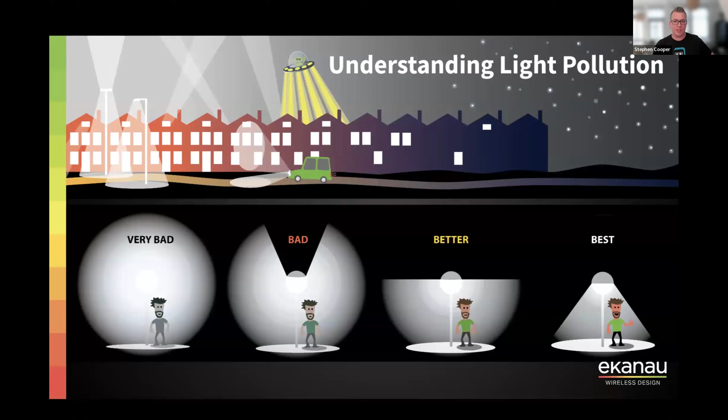So sorry. It's really good, especially if you're working with site foremen and people in manufacturing facilities that are keen to understand. A lot of people are generally curious. They're really keen to understand why do we need to do things a certain way. As Rob mentioned, this is a fantastic way to help convey that message. People might not understand RF, but they definitely can understand the difference between a light bulb and a flashlight.

Exactly. So just a little bit of RF theory when we're talking about antennas, and some of you might be familiar with this, especially if you've done Ekahau ECSE or CWNA, or any other vendor certifications typically cover this sort of fundamental concepts. But really, when we're talking about antenna radiation patterns and antenna gains, whether it's internal or external antennas, everything is in reference to what we call an isotropic radiator, and that is essentially an ideal radiator analogous to the sun. So 360 degrees in both horizontal and vertical planes. Think of it as a perfect sphere. But this antenna does not exist.

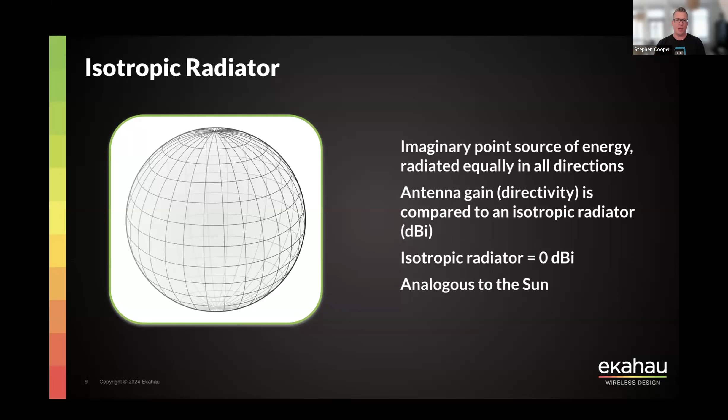It's just physically impossible to manufacture or produce it. But this is what we're referencing when we actually look at antenna radiation patterns. And when we're talking about beam width, and when we're talking about antenna gain and things like that, it's in relation to this isotropic radiator antenna.

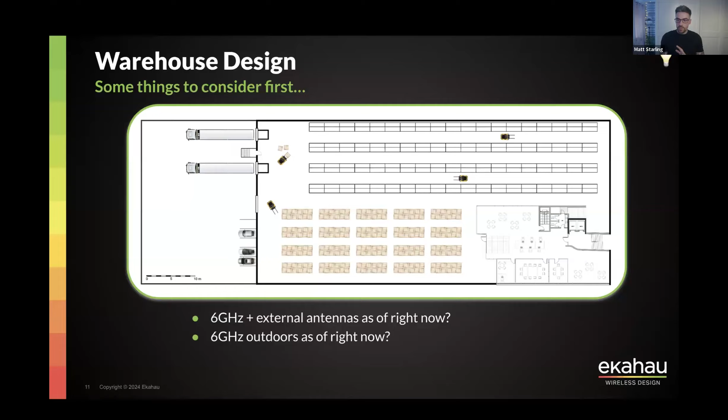But before we pass this over to Rob and Stephen to discuss this and how Juniper Mist approach this and what we can and can't do as of right now, we just want to make sure that everybody on the webinar is on the same page when it comes to 6 gigahertz, because you may or may not be familiar with the 6 gigahertz frequency band and the additional channels and the frequency band that we've got access to recently.

So if you're based in the US, it's fantastic because you get an additional 1.2 gigahertz of spectrum that you can use and leverage. So that would actually equate to something like 59 more non-overlapping 20 megahertz wide channels, which is fantastic because it gives us a lot more space to use for the radios of our access points and the client devices to be able to connect.

However, if you're based over in the EU, like quite a lot of us on the call presenting today, we don't get quite the same amount of access to the 6 gigahertz spectrum. We get about 500 megahertz, which translates into 24 non-overlapping 20 megahertz wide channels. Still fantastic. It means we've got that extra frequency band, that other lane on the motorway we can drive down, start shifting our client devices to 6 gigahertz, which in turn will benefit our older devices on 2.4 and 5 gigahertz.

But with 6 gigahertz, there's a few things we have to think about, especially with getting devices onto the 6 gigahertz frequency band, scanning the channels. But there's also something else called device classification, which I'll hand over to Mac to explain at a high level, because that's going to become very important when we talk about the complex environments.

Exactly. So it's no longer the situation where we have just a 5 gigahertz capable device and 5 gigahertz capable access point talking the same generation of Wi-Fi. Now in 6 gigahertz, we have more device classes and access point classes, and they have different limitations. Just to shout a few limitations: LPI, low power indoor. These are the access points and clients that only can operate inside. They cannot be operated using the battery. You cannot use external antennas. They must be built in, and you have power limitations.

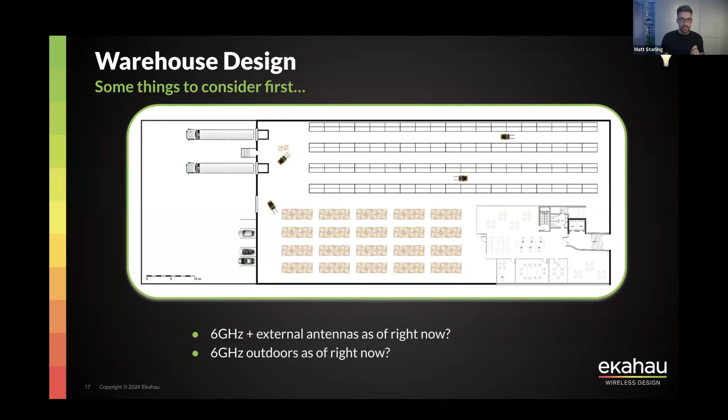So we have a demo prepared to walk and talk through with everybody on the webinar. But before we do that, we have a couple of poll questions we're going to quickly launch and discuss. Mac, maybe you can read it out whilst I get it going. We ask this question quite frequently, so we want to see what's changed.

This will be interesting to see because, like Max said, we've asked this question a few times before over the last couple of years to gauge where the community is at with upgrading to 6 gigahertz and what the current state and plan are. We'll give it a few more seconds for attendees to cast their vote, then end the poll and share the results with you and discuss for a few moments.

In Juniper Mist we've seen about a 20 to 30% adoption rate of 6 gigahertz in some large environments already deploying it, a mix of environments whether higher education, universities, or corporate offices. One big topic we probably won't touch on too much is security and WPA3 being mandatory for 6 gigahertz usage, which plays a big part in adoption beyond RF design and client support, so definitely keep that in mind for network requirements and design.

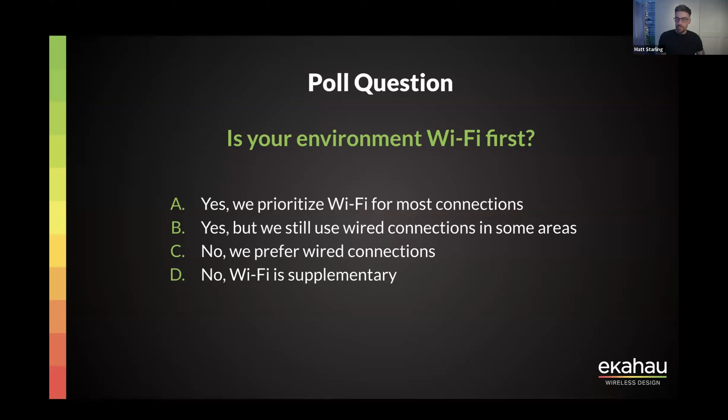Fortunately, a big percentage of the webinar audience does agree how important Wi-Fi is and wireless-first environments. Yes, some might still have some cables, but a big percentage do agree about prioritizing Wi-Fi for most devices. I'm sure 70+ percent think they are close to wireless first. But let me tell you that with the addition of 6 gigahertz, doing wireless first has become practical and not too expensive.

Previously, with just 2.4 and 5 in very heavy environments - tons of density, tons of clients doing tons of things, wireless voice clients on phones, constant video conferences everywhere - it was very challenging. We had to use directional antennas shooting from the top, tons of radios, reuse the frequency in a very smart way. Now it's as simple as doing a high density omnidirectional design in most open space offices with tri-band radios and tons of clients capable of 6 gigahertz. The capacity is there, it's just there. So yeah, especially in the States.

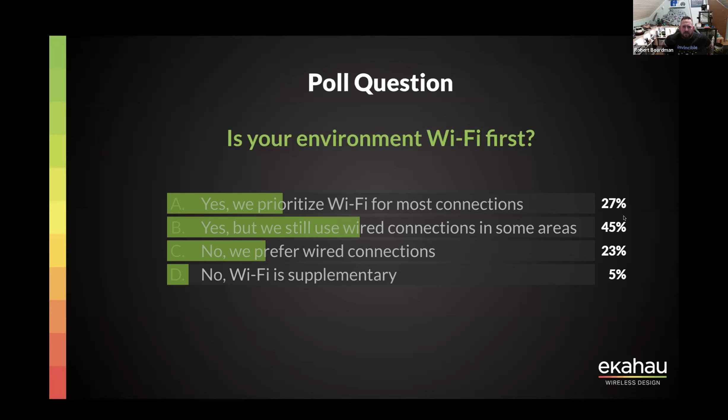I find it interesting that it is much easier from a Wi-Fi perspective now, but I think it's a lot harder from a planning perspective because now you need clients and security looked at again. When we usually go from Wi-Fi 5 to 6, or 4 to 5, the RF changed a little, the protocol changed a little, you might have needed a new device. But adding this spectrum and security completely changes people's viewpoint on how they can do it, because now they have to go to WPA3. And OWE - I think it was one of the best things to come out of the standard because of what it does, and it's probably one of the least used features outside of MU-MIMO.

MU-MIMO. Oh Matt, let's jump into the demo that we've got. I'll stop sharing so you can take over.

Okay, let me share my screen, and there we go. You should see my screen now.

So this is the Wi-Fi design made by the boys, by Rob and Steven. I'm running it because I have the best connection, I'm not on a cable, I'm on Wi-Fi, leading by example. So guys, let's talk through it.

What I have here is the 5 gigahertz design. And as we've discussed before, I've updated the design to 6 gigahertz as well, using the antennas and access points we've discussed. So we have both options.

Guys, I'll be your PA. Could you do me a favor, Matt, and select one of those APs in the aisleway, just at once, so we can see the RF for that. So when we were talking about designing for the aisleway, this is what that antenna does.

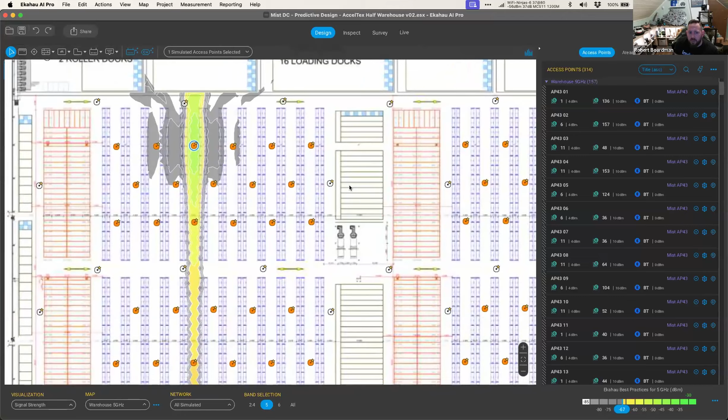As you can see, we are looking to just put it where it goes, so that way the racking really takes the racking out of the equation. This right here is definitely designed for high density.

This is basically 2 AP coverage. I've seen this go from, you could probably dump this down to, I think there's 4 APs per aisle, or 2 or 3 AP. You could probably dump this down to 2, almost even 1 AP if you wanted to be real cheap about it. I wouldn't recommend it, but money versus value is a whole different conversation.

Oh, don't ever put it there. No. In this particular environment, you're supposed to be my clicker, not your own clicker.

This environment was yes, and what this does is it takes advantage of the aisles. That's really what this design does. And in a perfect scenario, this is how I would design it.

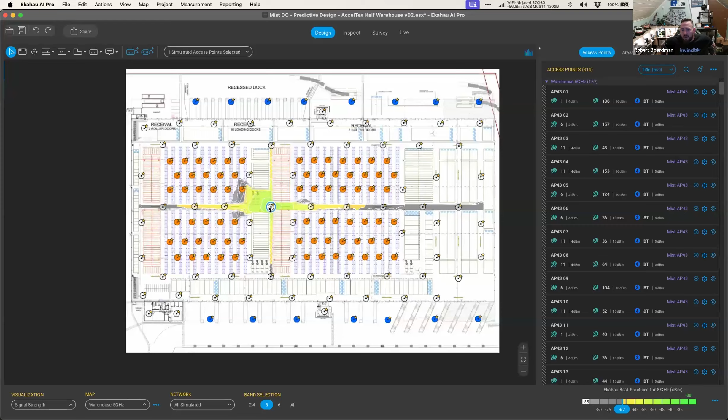If you zoom out a little bit so we can see some of the omnis - the white ones are omnis, and these are actually put in to cover those transitional spaces, and they work really well. Somebody was asking about the mixing of antennas and omnis, and whether it causes any issues - you get a very nice transition.

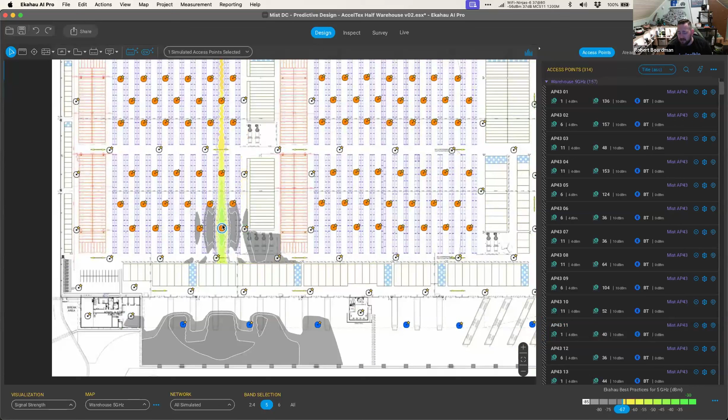You're essentially using the metal and the racking in there to help move things around. So I'd say usually about 1 AP every 100 feet for the omnis, because you don't really need a whole lot. They're low power.

The omnis over here, if you scroll down right there, those are meant for getting to the back of the trucks. As you can see, they're there so they can get back there.

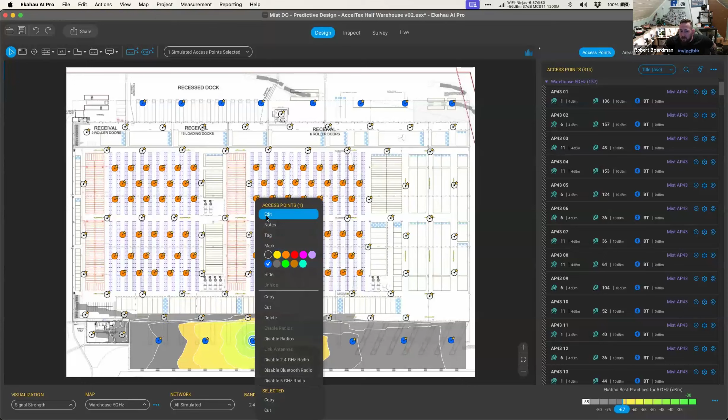And then you also have outdoor APs that help. The nice thing about outdoor APs like this is it's usually when you need Wi-Fi outdoors, it's those trucks. So you'll have the trucks coming in to basically start their communication. It's very low bandwidth, very low need. Latency isn't really an issue, so you're able to push the boundary.

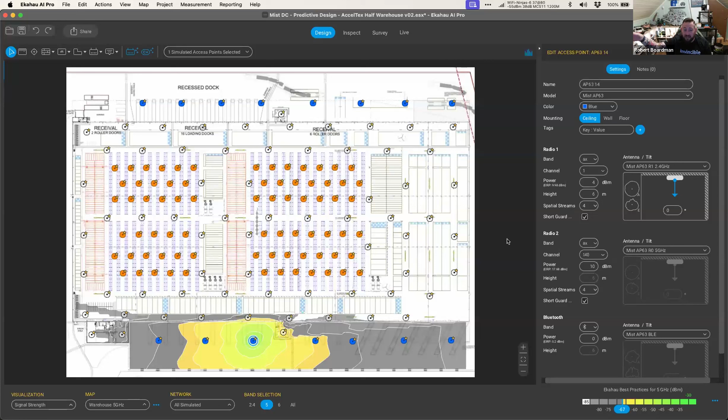You don't need super high MCS rates, so you can actually get like a negative 70, negative 75 out there, and it's fine because it's not for actual use - it's just for trucks to say, hey, I'm here. So you get a lot of coverage.

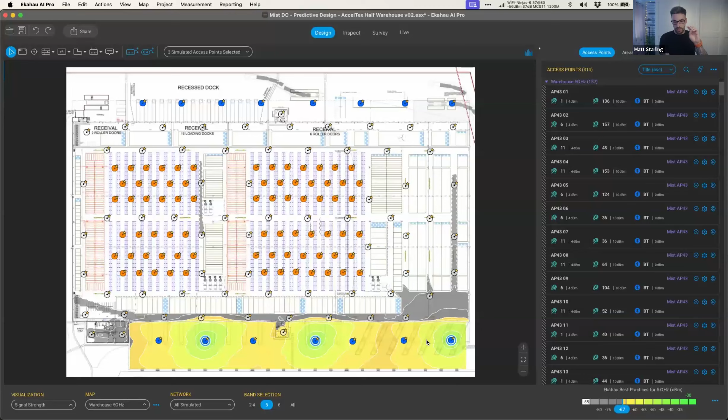Sorry to interrupt you there, Rob. Before Mac jumps to the next design phase he's got prepared, one of the big questions we had is what can we do right now with designing for 6 gigahertz with these outdoor spaces, and with these access points and antennas in the middle of the racks, leveraging the AccelTex antennas. Maybe you can talk us through this section of the design.

So today in the US, you can deploy the 45Es with antennas. 6 gigahertz will be disabled because it hasn't been allowed in the US yet. Most of the rest of the world, you can actually enable 6 gigahertz. There will probably be some countries where that's not the case, but I know here, most places in Europe, you're able to use indoor external antennas with 6 gigahertz.

Same with the outdoor right now. I don't think anybody is allowing outdoor 6 gigahertz yet. But you would deploy your 6 gigahertz capable outdoor AP and you just would have 6 gigahertz not enabled. So you design for it, but you just don't enable that band yet.

Yes, Mac, if you flip to 6 gigahertz, because I think you're on the band selection. So basically you can still design for 6 gigahertz for the indoor spaces and for the outdoor spaces as of right now, but it just might be the case temporarily. You have to have these radios disabled until we're at a point where we can enable them. Is that right? Yes.

So that's what you've highlighted there, Mac, those outdoor access points. So you can plan and design for these APs as of today and have the 6 gigahertz coverage. However, for the time being, they will probably have to be shipped with their radios disabled until a point where we can leverage AFC or standard power or whatever, and then be able to enable them. But you can still plan and design for it as of right now. Yeah.

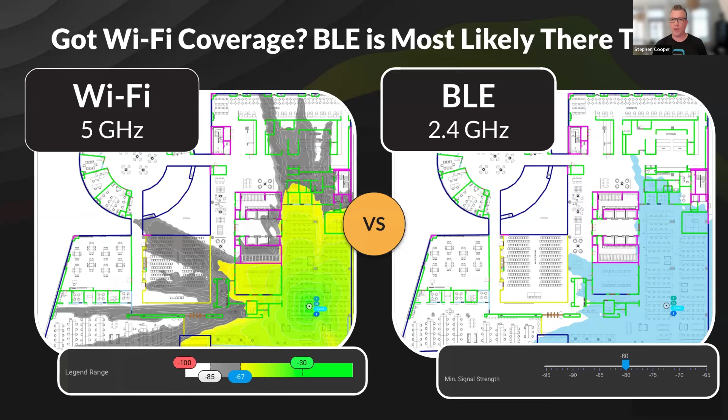And I know, Matt and Mac, you've got some examples of surveying with a Sidekick. So the downlink is fine. You've actually been able to get away with direct replacements from the downlink coverage perspective. So definitely keep that in mind when designing for 6 gigahertz migrations.

Cool. All right, let's talk about location. Bluetooth, big segue there. So now we're going all the way back to 2.4 gigahertz. Fun.

So the reason why we wanted to bring this up is because location is actually very complicated to design for as well if you don't have the right use case in mind. But the same practices that Rob mentioned early on with those opening slides apply. You need to gather the requirements, the use case, the devices, what is the expected accuracy and experience with this. And is the use case in a downstream direction, such as wayfinding on a device, or is it upstream with tracking assets? All those sorts of things need to come into your design for gathering requirements.

What we're looking at here is something unique that we've done at Juniper Mist in terms of Bluetooth location. We actually built directional antennas into some of the best-in-class access points we have, like the AP43 and the AP45, which is this directional 16-element Bluetooth antenna array, which sends out Bluetooth signals in 8 different directions essentially, and also receives in 8 different directions too. And it's at a 45-degree angle down from the access point.

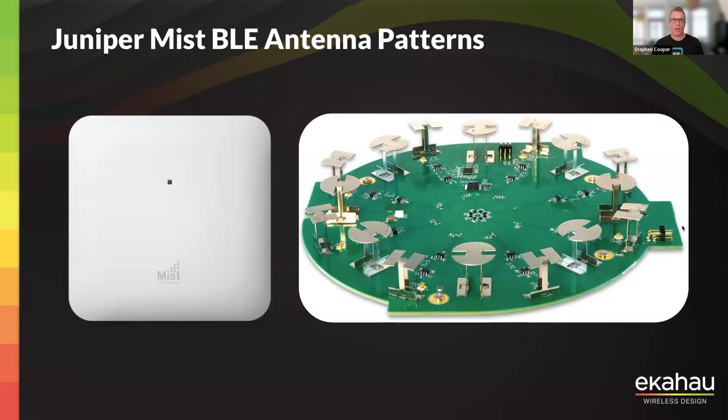So what does this mean? It essentially means that when you're doing a Bluetooth-based location design, because we built this into the Wi-Fi access point, you typically don't need a large uplift in infrastructure, or sometimes no uplift or additional APs when it comes to a high accuracy indoor location use case, because typically we can get about 1 to 3 meters for use cases such as wayfinding. So thinking about finding your way through a campus or a hospital or a building using a smartphone app, or even with asset tracking, 3 to 5 meters accuracy from this sort of deployment.

But there is the option to add supplementary Bluetooth access points in there called BT11s, which I think Matt will walk through a bit later. But there's all sorts of IoT use cases coming out these days, not just Bluetooth. So it's not just about location. You might be designing for some other automation or IoT use cases as well.

So it's very cost efficient. Wayfinding, you know, most people have a smartphone these days. Most people are used to an Apple or Google Maps outdoor wayfinding experience. So it's a very similar use case to that, but indoors. And then you can also use it for location analytics, dwell time analytics, path flow analytics through facilities such as shopping malls and all those sorts of good things too.

So lots of different use cases, but location discussions usually need to start with that question around what's the use case. Yes, and we've actually got a demo ready to show you after this as well, but we've got a couple of poll questions we wanted to ask you.

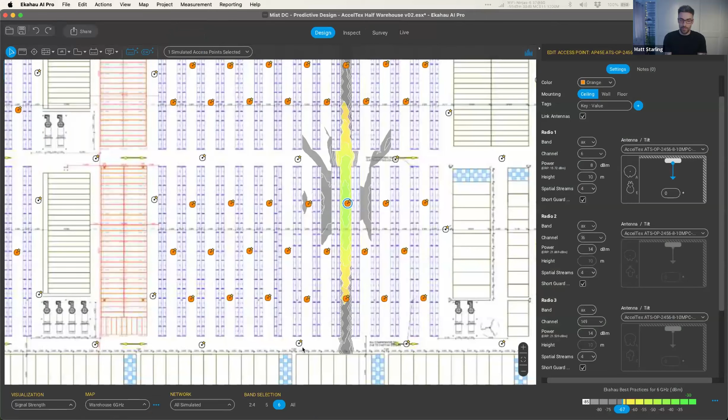Yeah, so close to 60% update the infrastructure between 4 and 7 years. That's the vast majority. Not bad. Cool. All right, Mac. Well, let's jump into the final demo for the webinar today. I know people are very excited to see this one.

Okay, let's do it. So I have a different project prepared for you, so we don't have to draw walls and waste time. I've seen this floor plan before. This must be a very famous building somewhere. It is. It's like half fake as well. So we photoshopped a lot of it.

Okay, so now, boys, we have a floor plan. It is scaled. I can prove it to you. We have a scale here. It is scaled properly, and we have areas where we say this is an office area, and then inside the office area we have an auditorium area that has a higher density of devices. So these are the important talking points. So Rob, Steve, what do I do?

Well, generally I like to start in the highest density areas, the hardest areas. The nice thing about this floor plan is you actually chose something that isn't just typical. Well, let me rephrase it. Some people would just typically blanket this with omnis and call it a day.

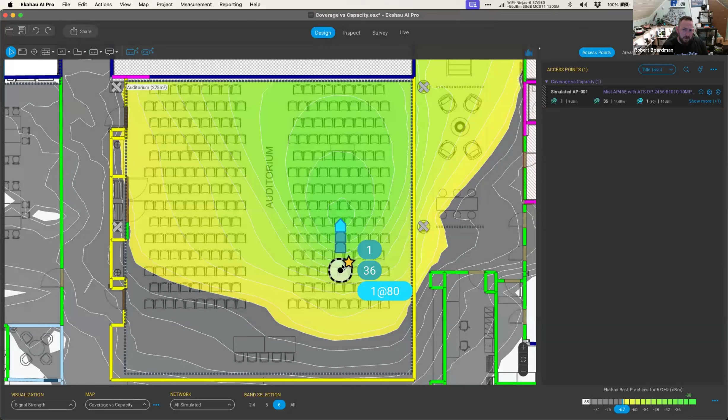But if you start to look at it, it's almost like what I'm going to tell you to put there. You have different types of environments. So this goes back to kind of that similar with the warehouse, where you have different areas and where you need to do that. Let's bring the power down on that 6 gigahertz for me, please.

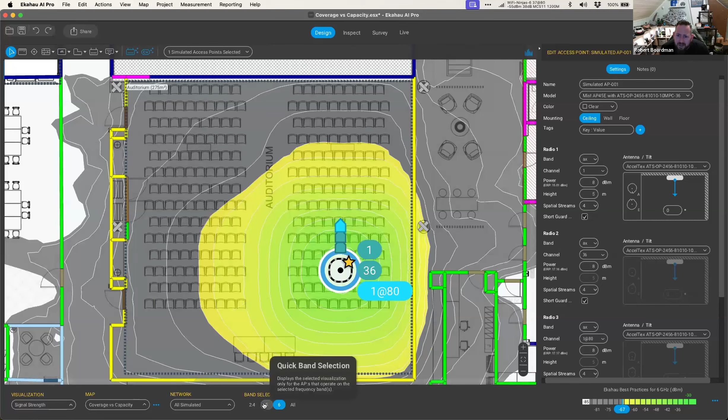Yeah. Is that the right antenna? That's the 8 to 10 dBi gain antenna. Go down. You want a different one? Yeah. Okay. Which one would you prefer, sir? Give me the 710, please. 710. I think that was the right one. Ceiling mounted, five meters above the ground, and lowering the power level.

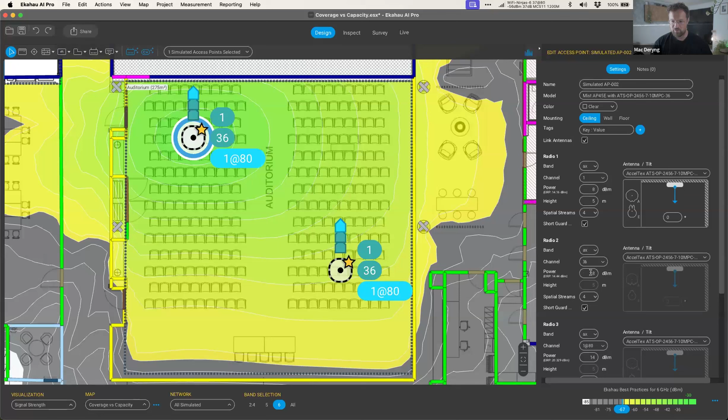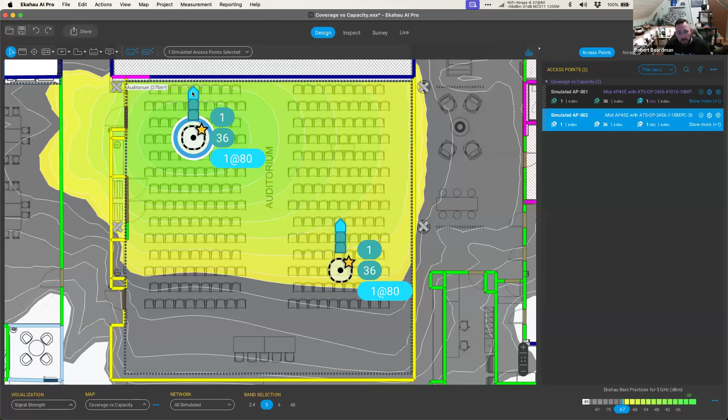But guys, look at the EIRP. So power level is 8 dBm, but EIRP is like 14, 15 dBm. That means that we have passive gain quite high on that antenna. Yeah. So as you can see, if you just select one of those antennas and change that direction, so it goes more vertical, there you go. And now you can see how you're getting that coverage. So this is that auditorium where you have that primary coverage.

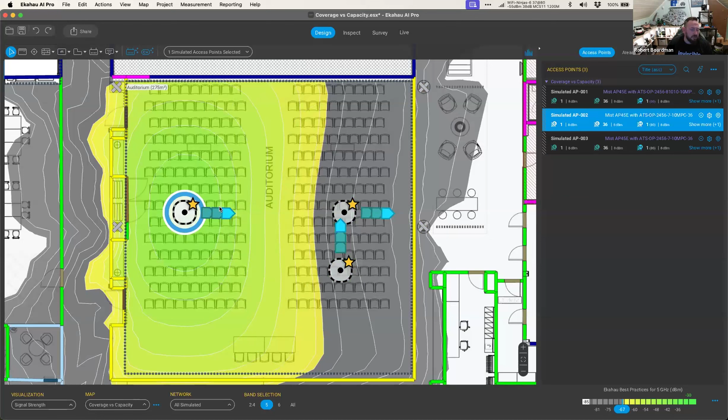And this would come down to, again, a conversation with your customer on, do I need 2x2 redundancy? Is this going to be a high use area? I've done some customers where the auditorium is a no technology zone. So you're more focused on making sure the connectivity is up towards the front, and the back, they are actually asking for you not to have technology there. So we start looking at what's the expectation of the room, to where if it's just general coverage, we'd probably get away with 2 APs.

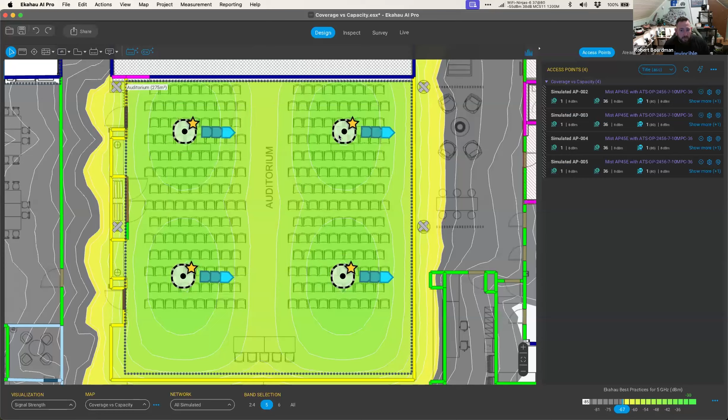If this is a developer room where they're going to be uploading code and doing all kinds of things, I'd probably move to 4 in there to have coverage. And then probably lower the power. I might even try to see if I get a smaller beam width on the antenna, but this one would be very good from a 2x2 coverage sense. Because again, if you select one of those APs, so we can see the pattern on one, it kind of sits there and holds in the area that you want.

And then we can play a little bit and lower the power a little bit there. Again, 2.4 would definitely be 3 dBm, which is the lowest we can go in the system. And in some cases, I might even turn off some 2.4 in there. So we'd start here because this area is a primary high use area. I want this to be done right. And this goes also to see how it's going to affect other areas.

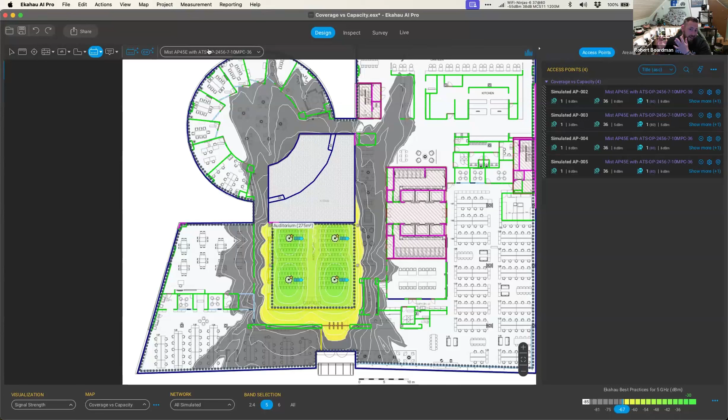Just a quick addition there, guys, never use that low power with internal omnidirectional antennas with low passive gain, okay? We always want to try to match the transmitting power capabilities of the clients that we use in that environment. So as I'm designing, I would use the lowest power that's going to be in my RF template. Generally my basic RF template for an Omni would be 3 to 5 dBm in 2.4, and then 8 to about 12 or 14 in 5 gigahertz. Giving yourself a 3 dB separation between your 2.4 and 5. Again, we don't have time, but that's another soapbox.

And then from there, now that I've got this auditorium design, I'd start using my Omnis and start working around where the people are. So as you can see, Mac's over there putting it in the conference rooms. Mac, 6 gigahertz. The people in the chat want to see 6 gigahertz. There we go. Give the people what they want. We're looking at 6 gigahertz now. The green is much greener in 6 gigahertz. It is indeed. But yeah, so as you're seeing, you're peppering it.

I'm in Europe and I still haven't gotten the meters to feet. I usually look at like 30 to 40 feet separation between APs. Because again, as you're using Omnis, that signal goes a good distance. You want to make sure that you are using it, but you're not being excessive. I'm a big fan of use the APs you need. You know, we have a feature, Mac, that can show you the distances between APs, right?

Never heard of it. Oh, there we go. Hey, Matt, it's Mac's first time using Ekahau. Just be gentle.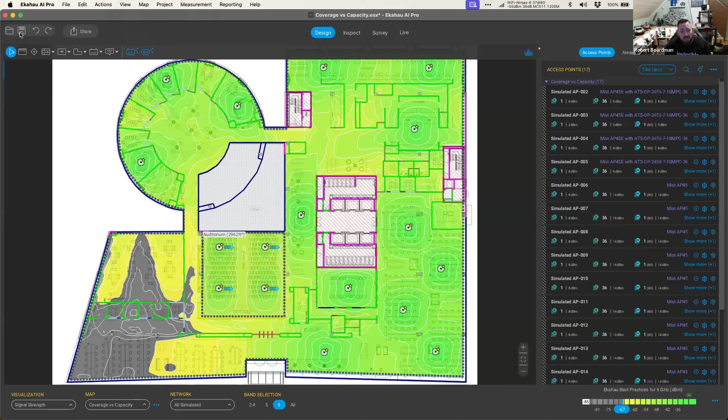You're already on the paternity leave mindset, aren't you, Mac? Yeah, totally, man.

So the interesting thing here now is we've got a great Wi-Fi design, and one of the slides we had earlier is that if you've got great Wi-Fi coverage from your access points, there's also likelihood to be Bluetooth coverage coming from the APs as well. So Mac, is there a way that we can see that with Ekahau?

Totally. I'm just sorting out the transition areas. I'm thinking for 802.11k to work between that area and that area. So I'm trying to place these access points more strategically, so they're not in the middle of the corridor, but they can hear each other with a decent RSSI. So when your client moves from here and goes down this corridor, they will always jump between these 2 APs. They will never drop off. So yeah, that's a good design tip.

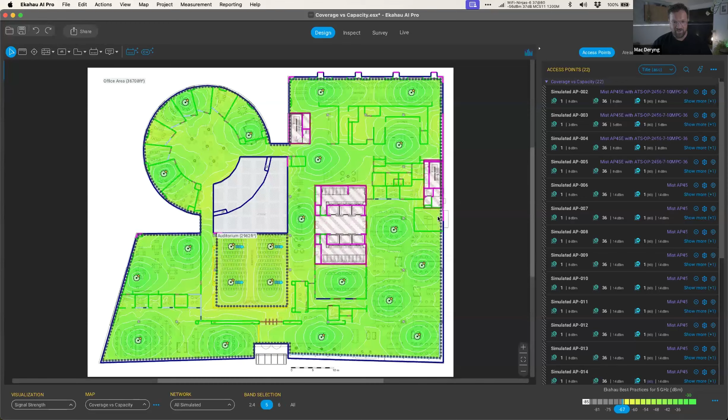Alrighty, so Matthew has asked about the BLE. So now we're looking at the coverage on 6 gigahertz from the Wi-Fi perspective. 5 gigahertz is also awesome. 2.4, no one cares. Okay, so let's go to the BLE visualization, Bluetooth coverage. Before you pop over there real quick, I want to say one last thing on Wi-Fi design.

As you see here, we excluded certain areas as part of design philosophy, especially because we're doing complex designs. Don't forget to ask if they actually want Wi-Fi in the bathroom or in the fire escapes, because more and more now I am seeing people say, yes, I need full coverage in bathrooms. Now, you're going to find very interesting things because a lot of times they don't want the APs in the bathroom because blinky lights seem to freak people out.

But again, fire escapes, I'm a big fan. If you're going into a fire escape, I do the cardinal sin of mounting it vertically on the wall. Because you have to drag the cable, and you're using reflection then. You're using the reflection of the staircase to basically get you some extra distance. So you use less APs than if you were to mount them horizontally.

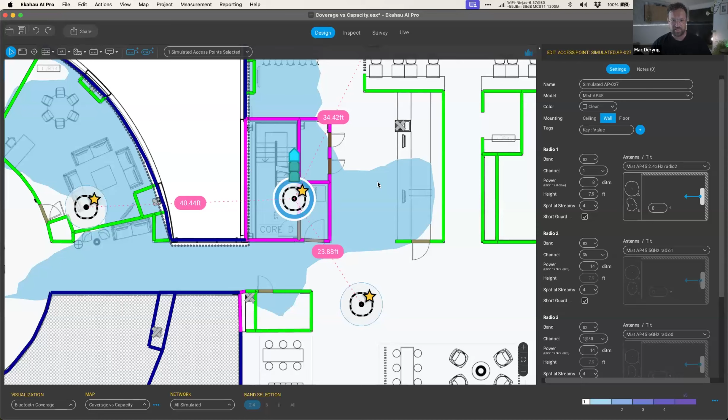Yep. So you would basically place an access point on the wall, probably somewhere here, and configure it to be placed not on the ceiling like a default AP, but on the wall instead. So now it covers the staircase up and down very nicely. Yeah. So you're basically taking that donut shape and you're turning it this way. So it's actually being designed to go the way that we usually don't want it to go. Exactly. Okay, talk us through the BLE.

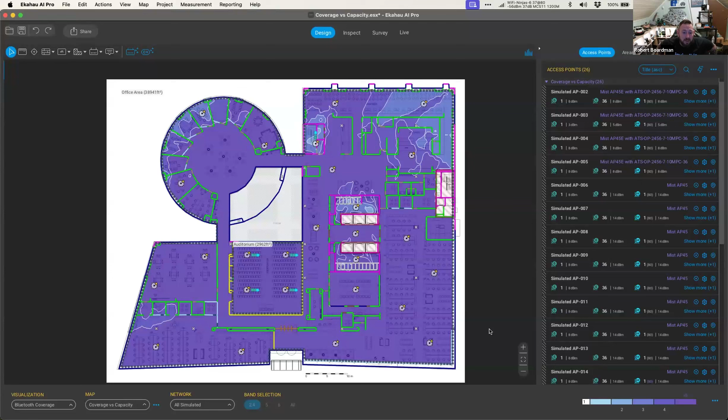All right, so now you're looking at BLE. Somebody asked about use cases. BLE has a lot of interesting use cases, but those are generally things that you need to design for beforehand and understand what you're doing. The two main would be wayfinding, so blue dot, providing a map so people can walk around and know where they're at, or asset tracking. Asset tracking is usually the most used, especially during COVID. Nowadays, people have BLE tags on their badges, and they want to use that for occupancy and things like that.

From this design, if you go ahead and scroll back out. As Matt was saying earlier about the Bluetooth and the possibility of you having Bluetooth already built in is nice, but never, ever, ever take your Wi-Fi design and compromise it for the BLE.

With BLE, we have things that you can actually add. Every vendor has beacons. They have a way to add additional Bluetooth or BLE if you need it. Sometimes people lose sight and say, crap, I need to do a blue dot design, so I need to pepper this place with APs. And turns out you just made your Wi-Fi crap to try to get a Bluetooth design in.

So that's a little segue of warning there. But generally right now, if you do a high density design, like Steven said, you're going to get 1 to 3 meter accuracy with asset tracking, which is generally nice because then you don't really have to do much of anything.

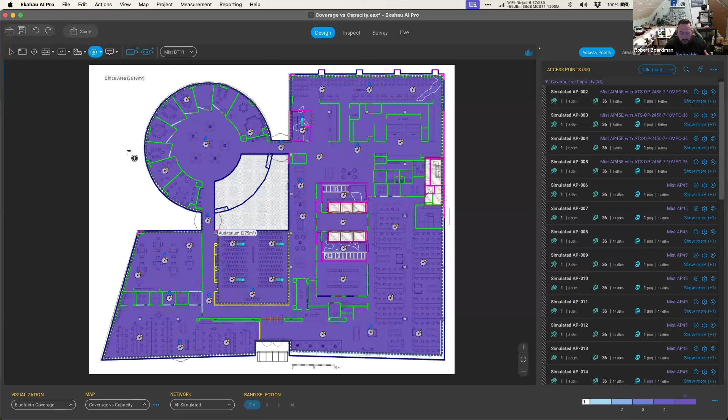Blue dot is a little bit different because there's a lot of magic that goes into it from the back end, where you're defining paths and defining where people are allowed to go. Because with Bluetooth, since it's a pulse technology, you kind of hop a little bit, so you want to give that smooth experience. You need to actually give some boundaries and do a little more work behind there. You might need to do some additional BT11s, which is the mesh version of a Bluetooth-only AP, to give you additional coverage. But generally with mapping and stuff behind it, you won't need to add too many more.

So with this design, we're not looking at 1 to 3 meters accuracy anymore. Now you're looking at 1 meter realistically with a blue dot design. Honestly, not even kidding, that good.

That's really insightful to see, and some great tips there from Rob and Stephen about supplementing your Wi-Fi design with those Bluetooth beacons so you don't go crazy and create lots of excessive co-channel interference. That was really cool to see.

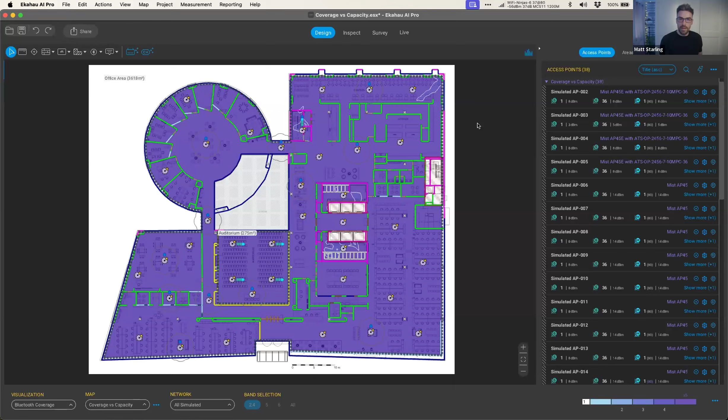I think, Mac, we've got a few other slides we just wanted to cover. I know we've gone a couple minutes over now, so maybe we can hop back there quickly. And Rob, I think you were going to tell us about how much of a nightmare this can be, right? I'm going to speed through it so we don't waste time.

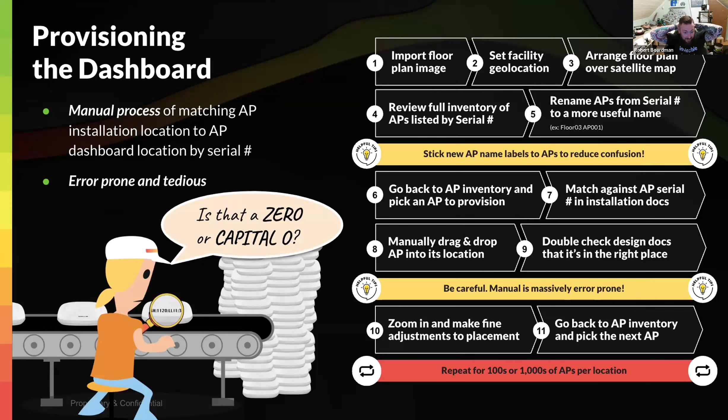Essentially, deploying something without thinking about it in advance can be very nasty and very manual. Starting from a floor plan, bringing it in, not using anything, you've got to go find the location, add it, review your list of inventory, and scan everything in. I like the guy on the conveyor belt there, because you never have the conveyor belt, you always have to play hunt and find. All the way down to now you're managing, trying to match those APs, those serial numbers, with vendors and mounting. It's painful. Let's just look at the process. It's an 11-step process to do it manually. So there might be a few better ways to do it.

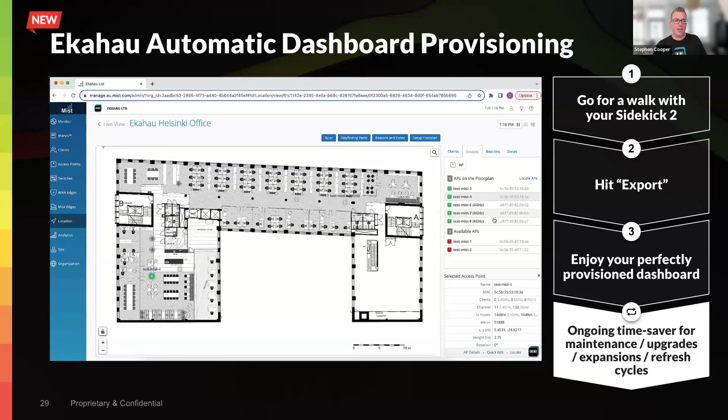It goes back to what I was saying earlier when Rob gave the 5 steps to your design, about knowing the platform, knowing the infrastructure, knowing the system you're deploying with. Some questions in the chat were about positioning APs from your design versus deployment, tweaking and adjusting them. Most vendors have ways of doing this in an automated way, but it depends on how it works for your requirements, your deployment, your environment, and how you're managing this as a project too. It needs to factor into your design and how that process feeds into the platform or infrastructure you're designing with.

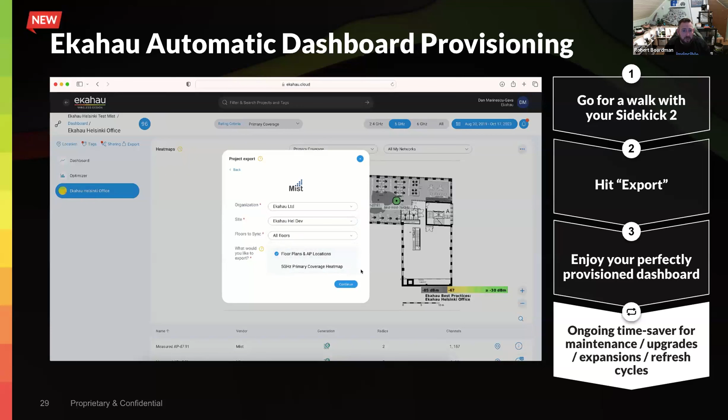This little GIF here is showing basically the ability to import your survey project and build a dashboard with the APs, serial numbers, and a lovely picture, which many people don't think is important.